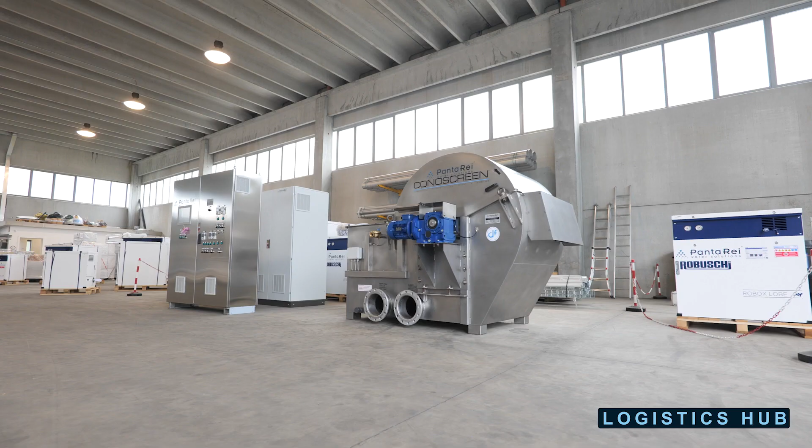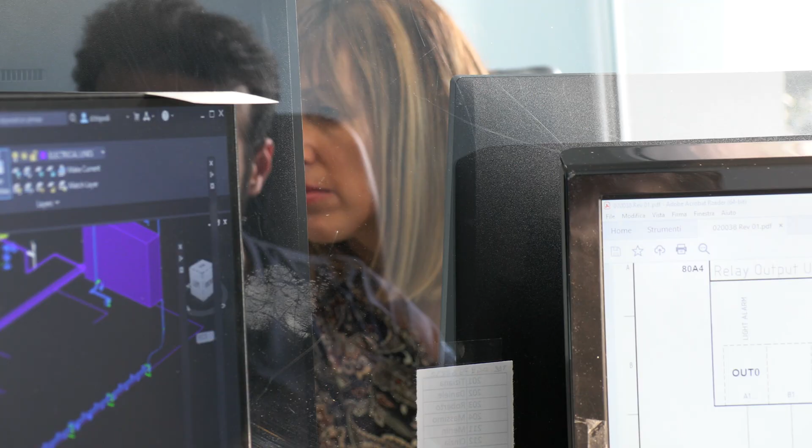As Panta Rei, we are a qualified partner of industrial companies, with an offering characterized by the design and supply of innovative technological solutions for water and wastewater treatment and recovery.

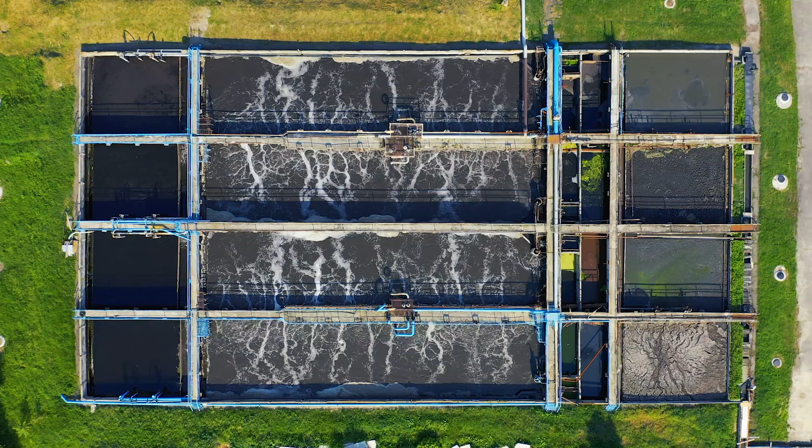Our goal is to provide state-of-the-art sustainable solutions for process and technology innovation, as well as for machinery and all plant components, having the responsible management of natural resources as our guideline.

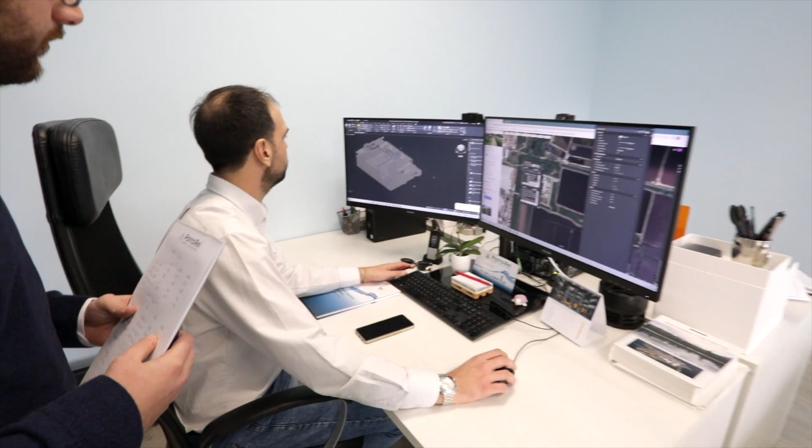We focus our R&D on sustainable water management and promote environmental friendliness through design solutions and plant technologies to mitigate as much as possible the direct and indirect impacts generated by customer production activities.

It's our duty to uphold human values and engage in socially responsible behavior, to improve the quality of life of our employees and the community in which we operate.

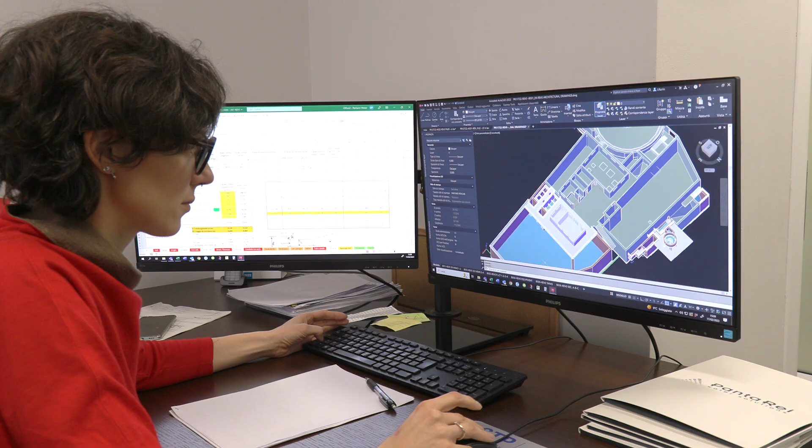We believe it's essential to encourage development through training and involvement of staff.

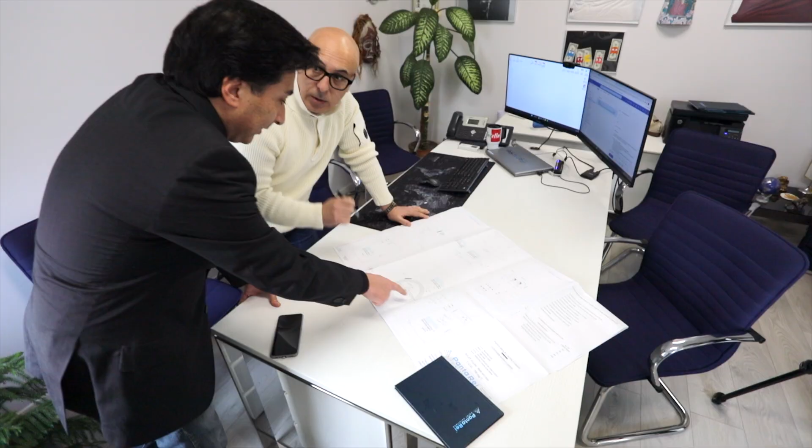Panta Rei's governance is based on ethical principles that commit us to pursue one or more purposes of common benefit and to operate responsibly, sustainably, and transparently in the countries where we have a presence and with our stakeholders.

Through our company, we want to create sustainable value over time. We really want to hand over a better future to our children.